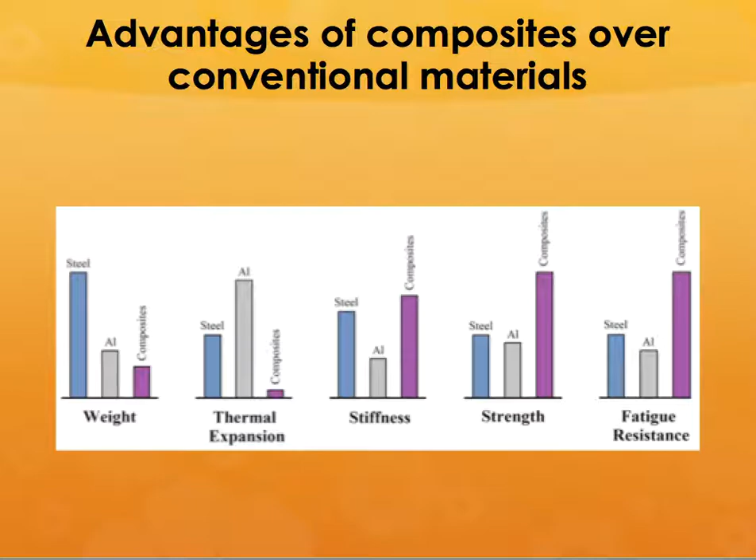We will start with the advantages of composites. We already talked a little about this, but if you compare from a weight standpoint, see the difference: steel is about 7 to 8 times the weight of composites, and aluminum is almost double. But since the strength of composites is much higher than aluminum, the weight savings is probably more like 60 to 70%. Thermal expansion is also much lower in composites. The stiffness is much better than steel for the same weight. So strength is higher, fatigue resistance is higher. But if you look at stiffness, strength, and fatigue resistance as a function of weight, composites are far better than any of these materials.

One thing to note is that the strength of the fiber actually goes up with decreasing diameter. There is also another reason for this improved strength, or improved properties, on an average.

The reason is that there is something called a critical flaw size for most of these brittle materials. Beyond that, it will fail in a catastrophic manner. But many of these fibers are smaller in size than the critical flaw size, so the probability of finding a critical flaw in a small fiber is very, very low. So you will have a very narrow band of strength properties - if you took 1,000 fibers, they would all be narrowly bunched across one single average strength. From a population standpoint, this gives you much more uniform properties.

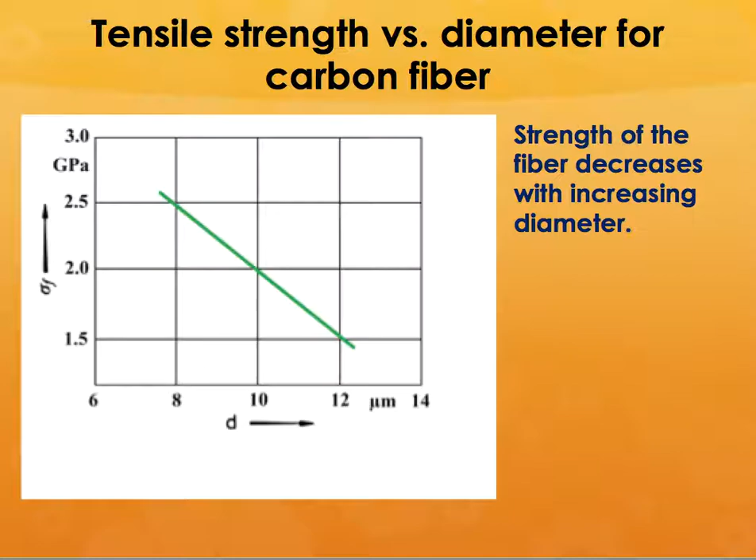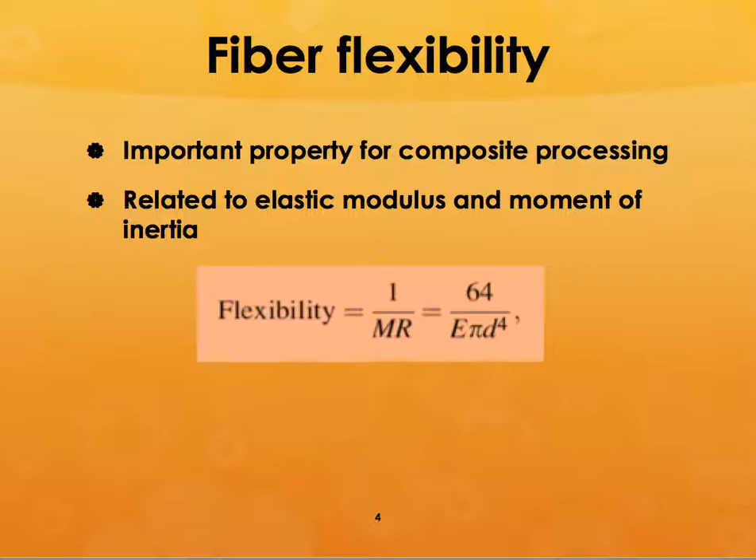As I said, strength increases with decreasing diameter. But when you increase the strength, there is a small problem: how easy it is for you to wrap these fibers around a tooling or place them in a mold, etc. This is based on what is called fiber flexibility, related to elastic modulus and the moment of inertia given by that equation. Flexibility is equal to 1 over mr, and also equal to 64 over elastic modulus times pi into d to the power 4. So the smaller the diameter, the more flexible the material becomes.

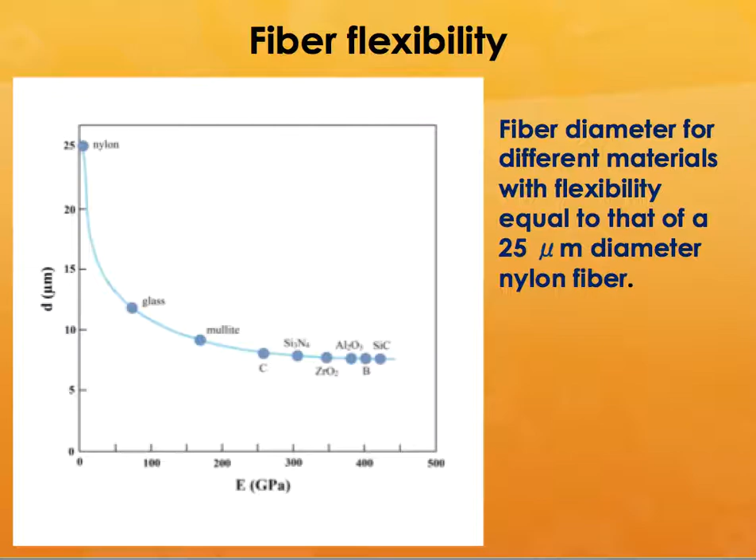The way you represent it is you represent the fiber diameter of different materials with a flexibility equal to that of a 25 micron diameter nylon fiber. You can see that the stronger materials like carbon, silicon nitride, zirconia, alumina, silicon carbide, boron, etc. are almost bunched along the same line, and they all have pretty high elastic modulus. You can see that silicon carbide is probably the stiffer one compared to the diameter of the fiber.

The fiber spinning process has four basic variations. The first one is wet spinning, and most carbon fibers are made by wet spinning. The other is dry spinning. You can also melt a precursor and pull it through a set of dies, called melt spinning. Or you can have what is called dry jet wet spinning. All these basic variations are selected based on how well you can orient the chain of atoms in the fibers - what is the effect of stretching the fibers, what kind of skin effect you have in these fibers, and the draw ratio, etc.

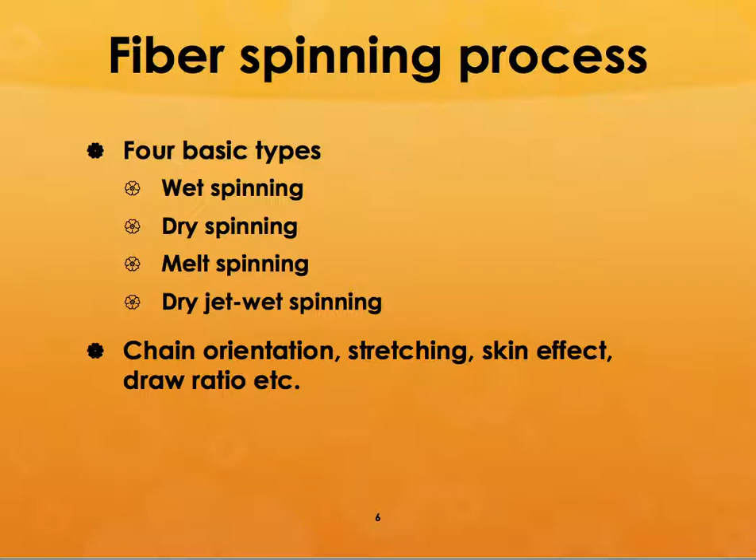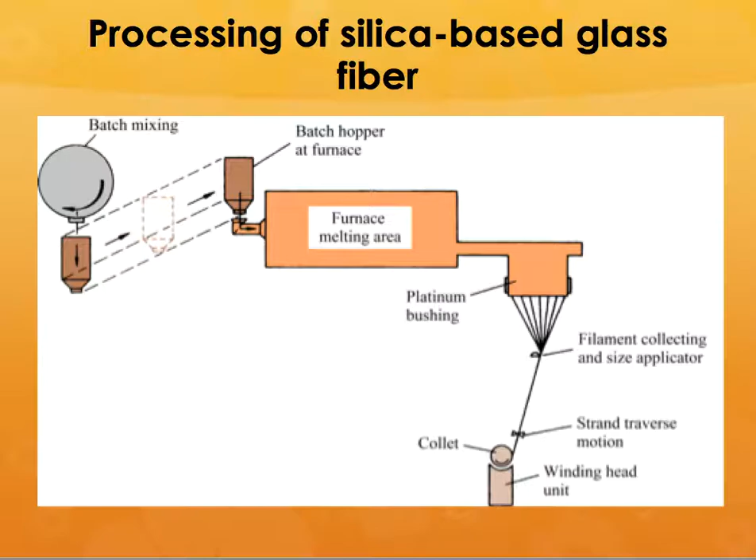Typically a glass fiber is done by what is called a melt spinning process. You melt it in a furnace, and then it comes out through multiple dies with almost 500 to 1000 holes. As it comes out, it is cooled, and there is a collecting device, and then you just pull it and collect it across a mandrel or a spool.

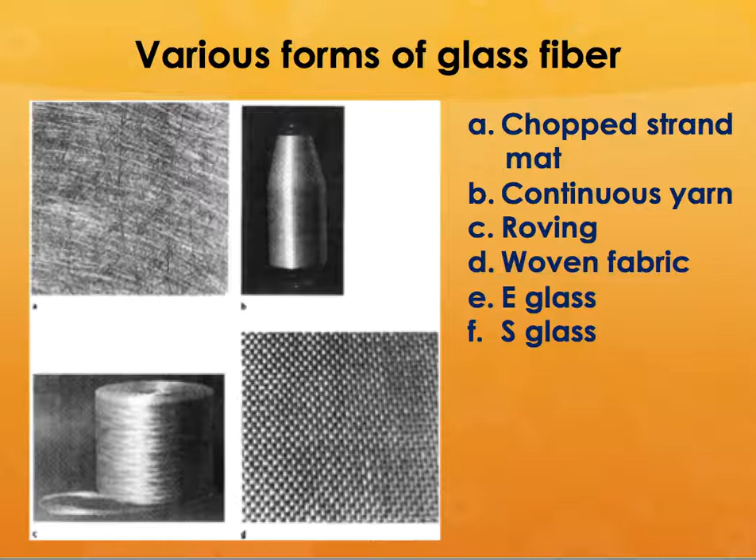These are the various forms of fibers: you can have a chopped strand mat, continuous yarn, or woven fabric. The two varieties of glass fibers are E glass and S glass. E glass is the standard variety, and the S glass is the variety used by military applications and so on.

In glass fibers, production is done either by melt spinning or by what is called a sol gel process. You dissolve the material in a solvent, pull out the material, and then evaporate the solvent. In this process, the fibers are drawn at a lower temperature compared to other ceramic fibers.

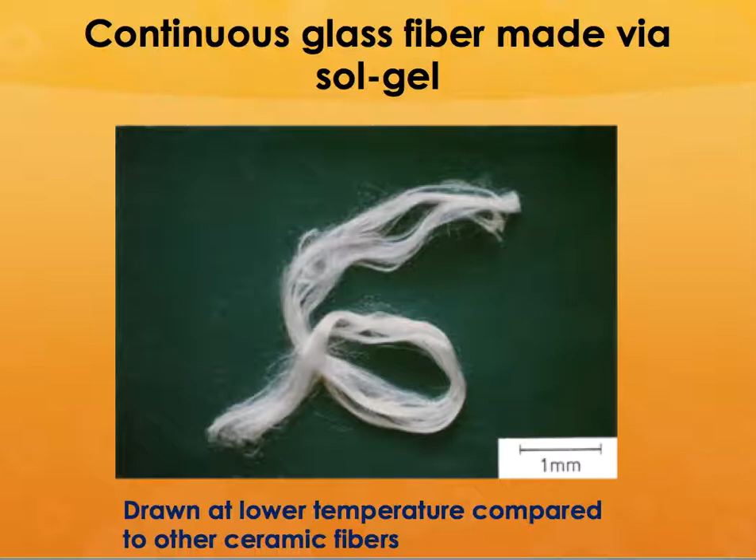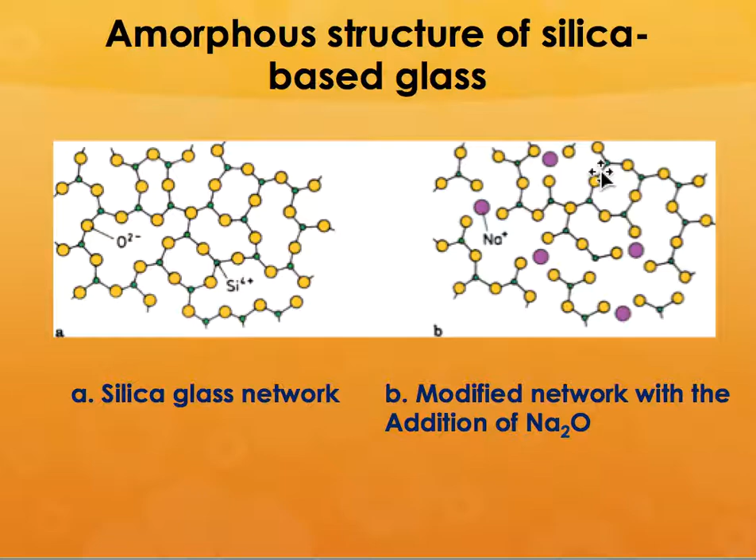On the left hand side, you see the standard silica glass network. But in many cases, you have to modify this network by adding sodium oxide, or a combination of sodium oxide and calcium oxide, to reduce the melting point of the silica glass network, so that it's much easier to pull the material through different sets of dies. This gives you an amorphous structure. Most of the time with glass fibers, you will not have a crystalline structure. If it is crystalline, it becomes extremely brittle.

In the case of boron fiber, it's a chemical process. As it is pulled, you could have a tungsten wire substrate around which the boron material is deposited, and then as it comes out, it is pulled onto a drum and spooled.

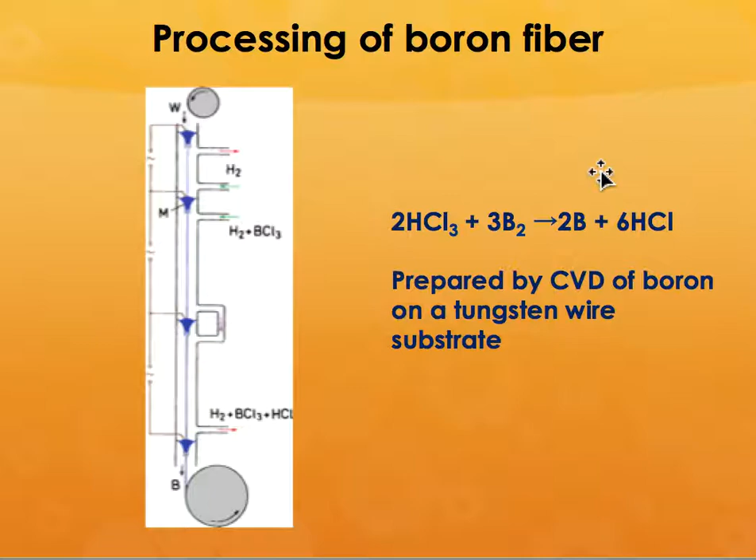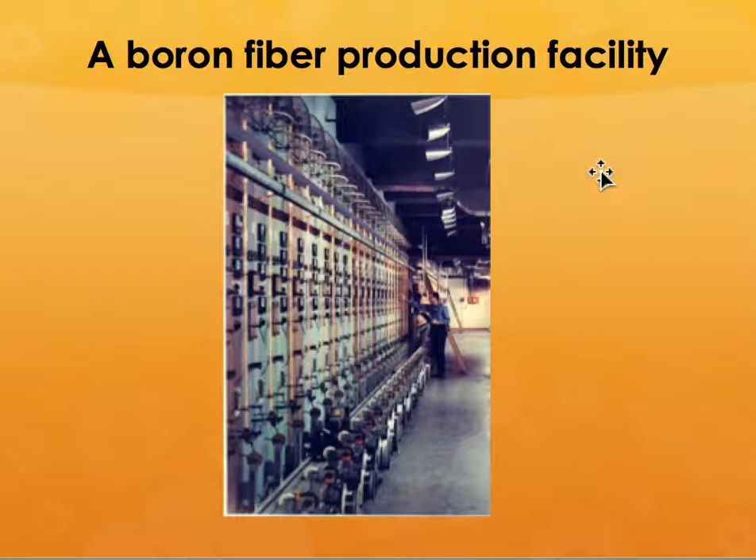This shows a picture of a boron fiber production facility where high volumes of boron fiber are made, and this shows the comparison of wire speed versus various boron fiber diameters.

If you pull it at a very slow speed, you can probably pull it at a much lower temperature. But if you pull it at much higher speeds, you have to pull it at higher temperatures. If you go beyond a certain temperature, the fibers tend to become crystalline, which is undesirable, so you want an amorphous boron fiber. Depending upon the temperature at which you are extruding or pulling it, you can choose the right kind of wire speed.

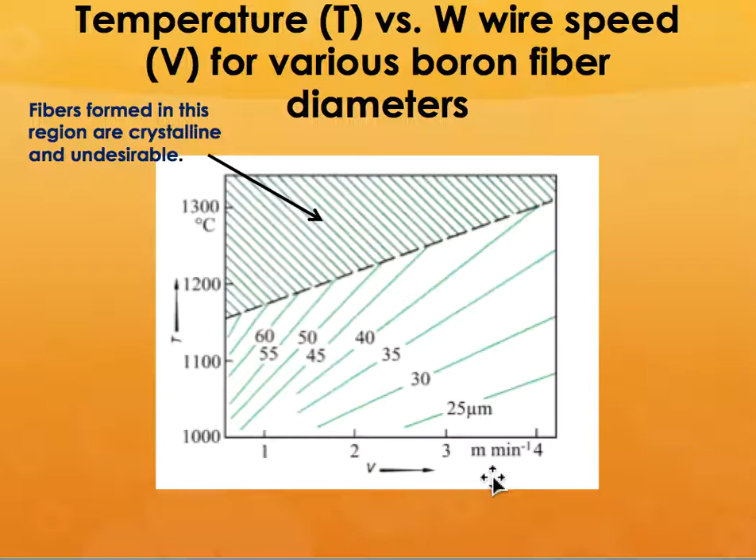This shows the cross section of a boron fiber with a tungsten wire core. The inside is a tungsten wire core, and the boron is uniformly deposited around it so that you get a perfectly circular fiber. Note that 1 centimeter is 10 microns here, so the whole fiber is approximately 100 microns, or about 0.1 millimeter.

Compare that to carbon fibers. Carbon fibers are of the order of 5 microns or even lesser. It used to be about 10 microns, 7 to 10 microns, but now carbon fibers are made at a diameter of 5 microns or less.

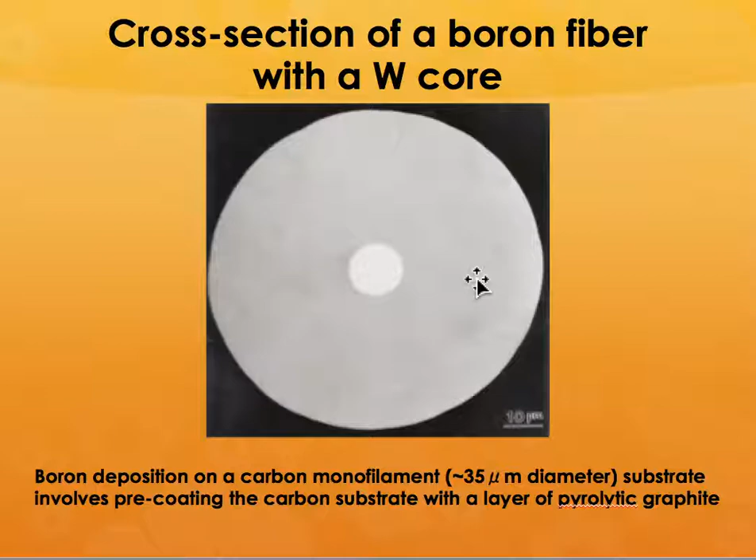This shows the reaction zone around a boron fiber. Around the center, you have a reaction zone where the boron might react with the tungsten wire, forming tungsten boride of various stoichiometries. You might also have some silicon carbide formation around the fibers, around the boron structure.

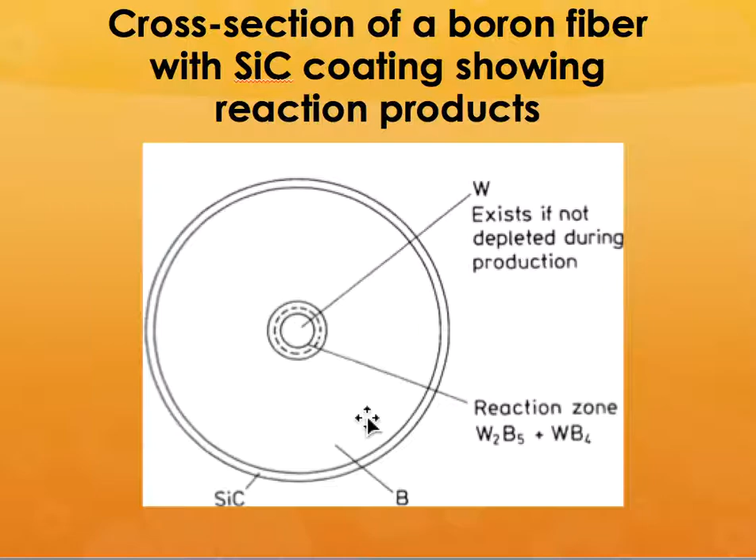If you look at it at very high magnifications, you can see that the boron fibers have what is called a corn cob type of structure. This is because when the boron is depositing around the fibers, it doesn't deposit uniformly - first some part deposits, then more boron comes around it, so it tends to become a corn cob type of structure.

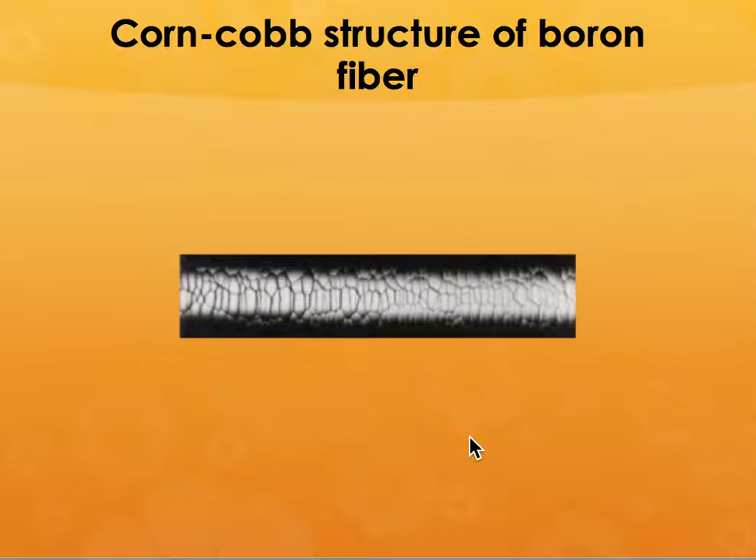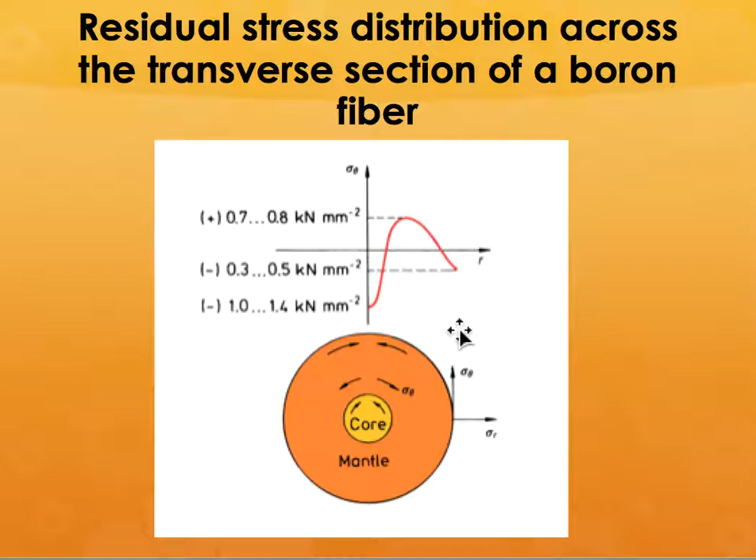When you deposit it this way, you're going to have different kinds of stresses around the fibers, so you get some amount of residual stress across the transverse section of a boron fiber. In some cases it is good, but in general you try to reduce the residual stress as much as possible.

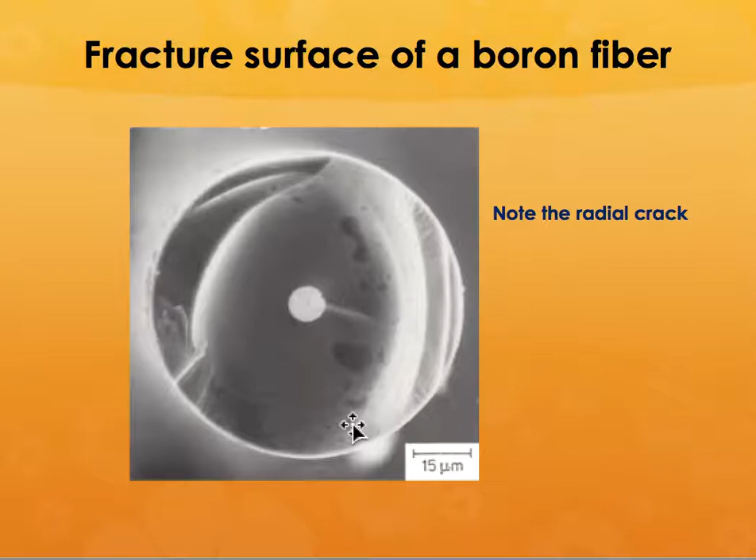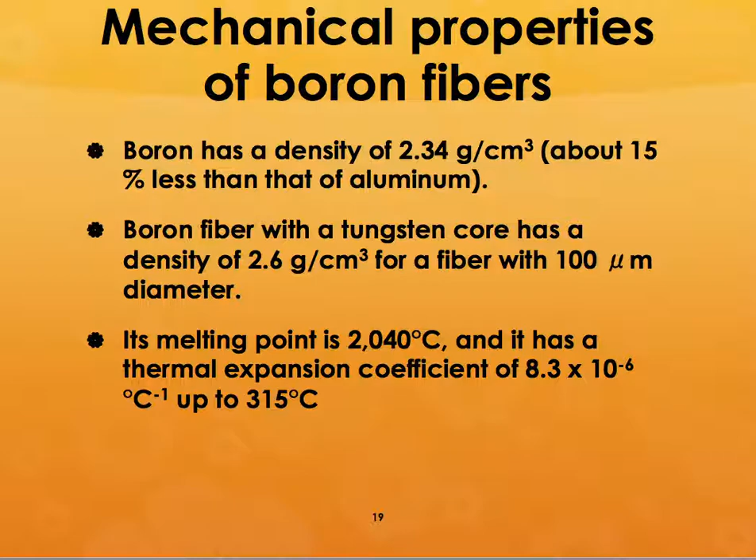Some advantages of boron fibers are that they have pretty low density, approximately the same as aluminum, but they have a very high melting point and a pretty low thermal expansion coefficient. So it's a good high temperature fiber reinforcement for different materials. If you have a metal matrix composite, you tend to use boron fibers because they can take very high temperatures and have a low thermal expansion coefficient, so the material doesn't crack due to the difference in thermal expansion coefficient between the fibers and the matrix.

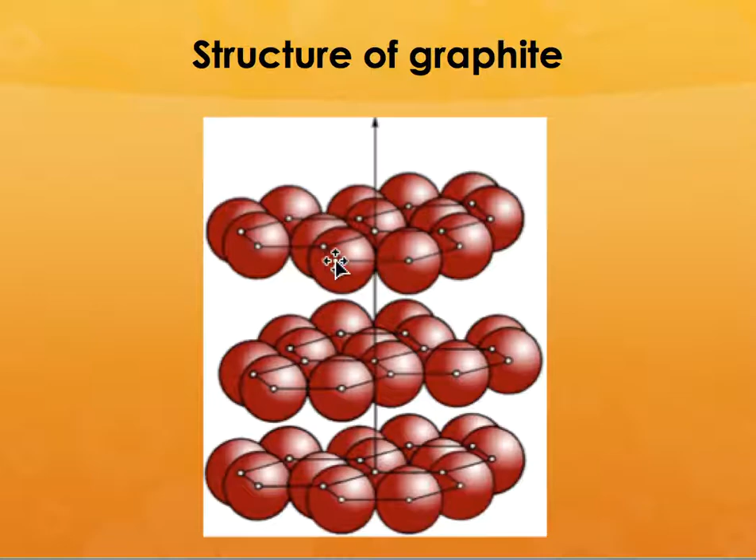Now coming to carbon fibers - carbon or graphite has a hexagonal close packed structure. These are the different carbon atoms, and they tend to pack well around that, as shown in this schematic. It has a hexagonal layered structure, which we call an AB structure. This stacking makes it pretty strong in the linear direction, but pretty weak in the transverse direction. Let me stop here and continue after this.